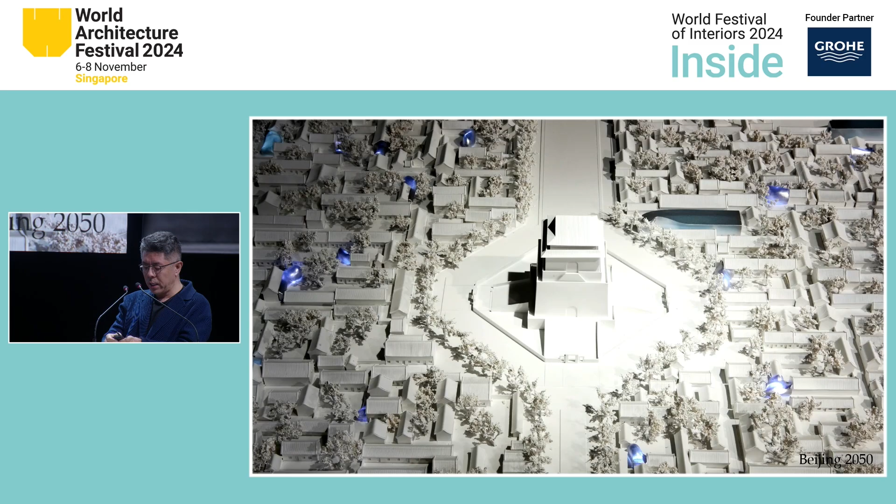And those are toilets, because in those small courtyards, they don't have a toilet. So I decided to make a new bubble structure with a toilet inside. Here you see the new structure and the old structure.

The reason I'm showing that is to talk about what nature is in this case. There was a famous writer saying that in the traditional courtyard, what's most important was the negative space, the emptiness inside the courtyard. In the courtyard you have sky, earth, trees, and nature, and the people live around it, they have a family, they have love inside the empty space, which is the most important thing. Architecture and buildings were just a definition for the courtyards, so the buildings are secondary in this traditional value.

But in this case, we try to use this reflective material quality to show the surrounding sky, trees, and old buildings into the new structure, so that this bubble almost disappears into the space.

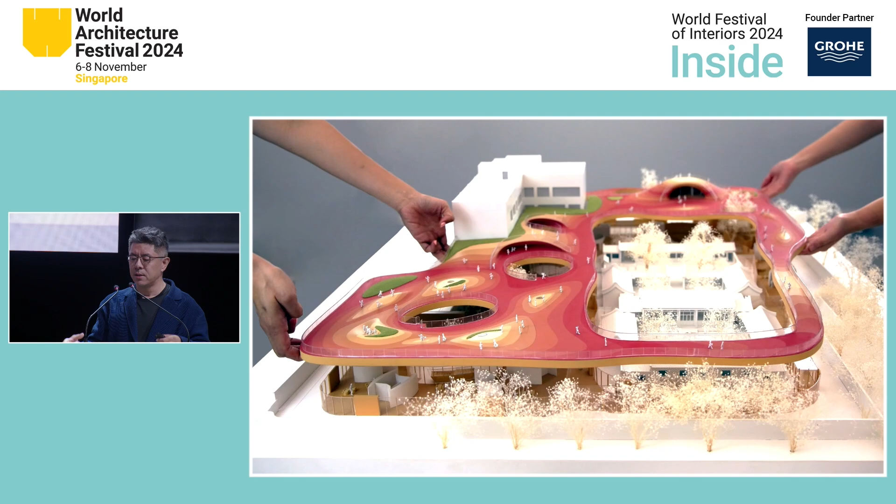The new and old look totally different, but they're connected - all the spaces underneath the classrooms are connected. When the building was completed, you can see the kids running around on the new roof, which is very colorful. So the color and material of the architecture clearly tell which part is new and which is old, but they both have a courtyard.

Remember I mentioned the courtyard typology - the empty space and trees inside the courtyard were more important than the architecture itself. That's why I think it's important to continue this typology, protecting those trees by providing the new courtyard. Inside this space you have natural light and natural ventilation.

People can play outside, and it's more like an inward-facing kind of space. But both new and old architecture respect the nature, the trees, and the scale.

Actually, if you stand in this old courtyard and look around, you don't see the new building at all, because the scale of the new building is also single floor. You can only discover it when you enter the space. Here you can see the new building through an old gate.

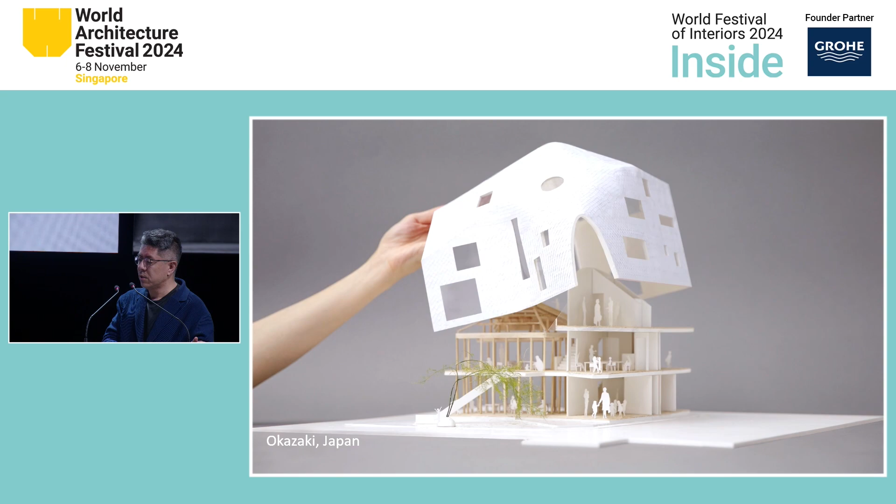This is another kindergarten, a very small house we renovated in Japan. You can see the wood frame - that was an existing building, a house where the owner lived for generations. They wanted to demolish their house and build a bigger building, the community kindergarten, so the idea was to keep that wood frame as part of the new structure.

They had this ceremony when they started groundbreaking - I think that was such a moving moment. This small project, not many people involved, but they really respected the land, which is the foundation for the building, and also a foundation for the families and the memories.

This is when the kids were standing here, expecting the new kindergarten, the new house. And that's when the building was completed. From outside, you see this white tent, almost like a soft building with some windows. From inside, you see the old structure.

So the old structure was half of the new building, and we kept the structure to hold some space, which saves some budget, but more importantly for us, to keep some memories from the past. So the family, the owner, when they're in the new building, they can see these old wood members and remember their old house. The children, when they grow up, know the space has stories about the building. What's inside is deep rooted into the story, the narrative of the land, but outside it looks different. You see these neighbor houses, and this building looks new and almost a little childish.

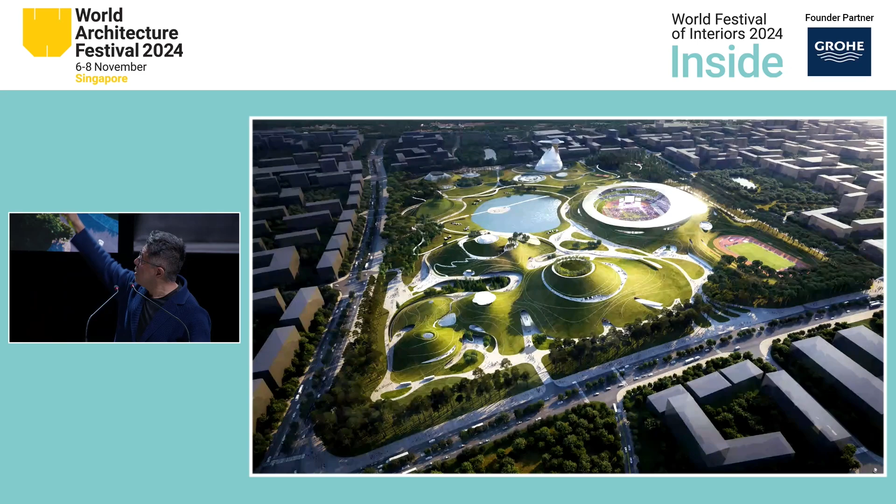Here is a rendering, a proposal for a sports park in China. It's a very large scale. You see several stadiums here, but the idea was to bury all these stadiums into green mountains. From outside, you see this green slope, very large scale, almost volcano scale. But you can also climb and walk around those green mountains, reach the mountaintop and look around. What's inside is a very large stadium like this. This is another mountain; inside is a swimming pool, but you have natural light and natural ventilation. It's not underground, it's above ground.

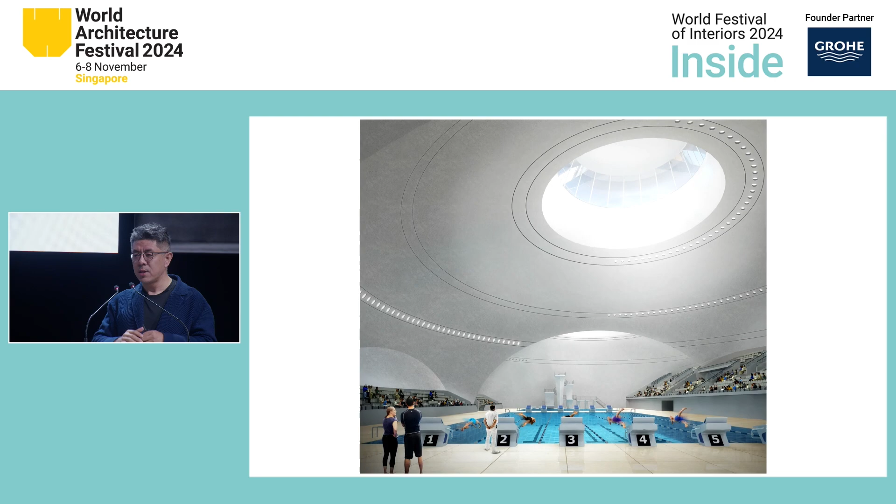We just replaced the building facade material with green, and then we completed one outdoor stadium. Now we're constructing the rest of the mountains. So what we're creating here is not a building, it's not a monument. Instead, it's a park, a natural environment. People can feel free, they walk around, they can wander on this slope. The idea is the stadium is not just a place for matches or competition, which is the core value in our modern city—we build new buildings to show strength and power. But here you feel freedom, you feel the green. It becomes more leisure, a daily space for people to bring their pets, family, and kids to enjoy nature.

So you see the whole environment—we try to bury all these functions to let the large-scale structure disappear. But underneath, you still have the building, right? You have the corridor, you have the structure. This is some concrete entrance, through the space underneath the green into the stadium. In the future, there will be a new high-density city around this place. So in this area, the idea was not having many big buildings, but an empty park, a green space. I think it's to borrow the concept from the old traditional courtyard, but use it at a larger urban scale.

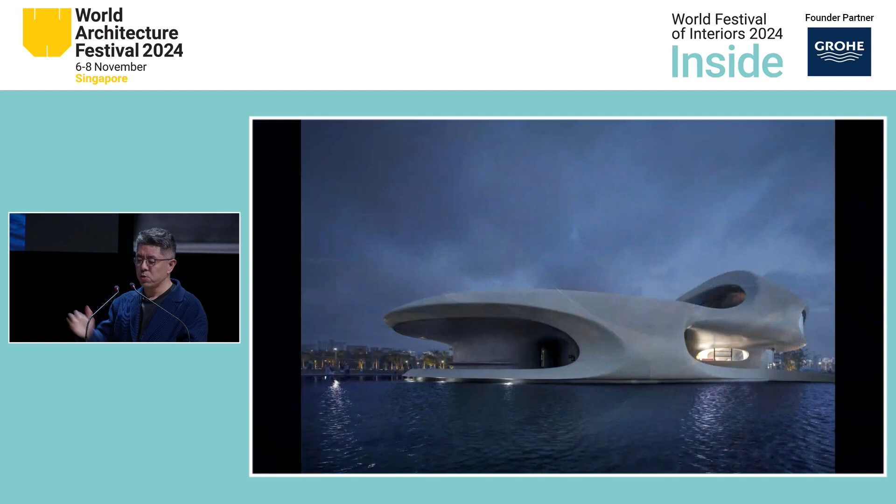So those holes are the key, which again is emptiness. Inside those holes, you have a shaded space, which is very important for this tropical island, a very hot place, because they provide shadow and air ventilation. But we're also using holes in the ceiling to bring some natural light into it.

You can see the bookshelf. In this space, you can sit here with some dark holes, some bright holes, and then look at the ocean from here. So you can read a book with this new angle to observe the ocean, the sky. What's important to me is that, of course, nature is objective—the ocean is always there, the ocean is always beautiful. But what's more important is to create this surrealness, a space of surrealness, where you can stay and observe nature from a different angle.

There's a staircase, and there's another reading corner. We also created this small library space for kids, so only children can come in here. We also bring natural light, so it's a small space with a lot of holes as well.

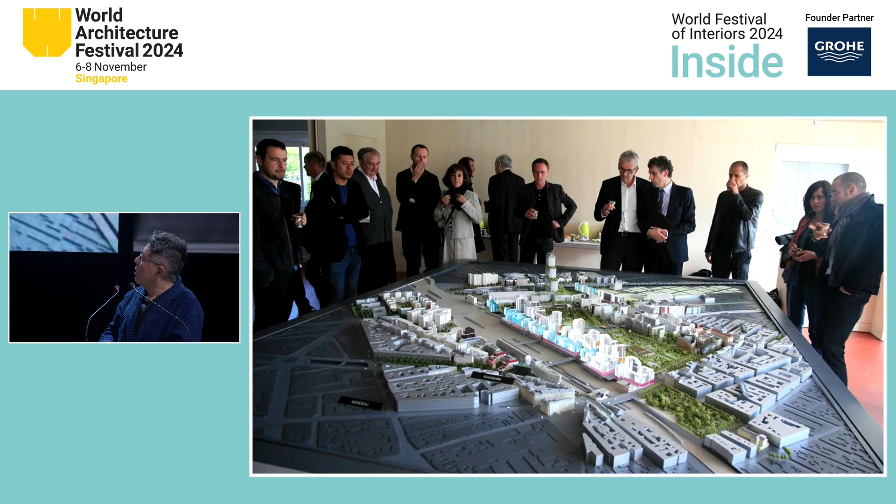This is a residential tower we built in Paris, called UNIC. It's a building in this community where they have a lot of international architects, and each one designs a building in their own language. Our building introduced a lot of curvature onto the balcony.

We have a lot of outdoor space, but what I want to talk about is how we designed it. We almost hand drew all these balconies, which is why you can see they all look very random and organic, waving in different ways. I think that's how we can have a very natural feeling in a residential structure like this.

So that's the view down. From here, you see there's a kindergarten at the podium, and people have this opportunity to see the nature and to see other balconies. So this almost blurs the shape of this building, using these curves to make it more of a living structure.

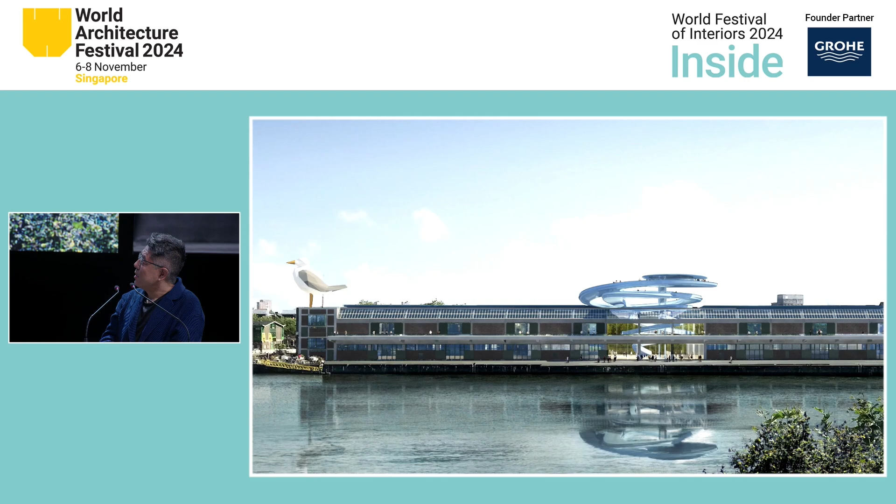That's why I also designed a bird here. I brought a seagull over there because I thought the seagull was a metaphor for movement, like people move around as a bird.

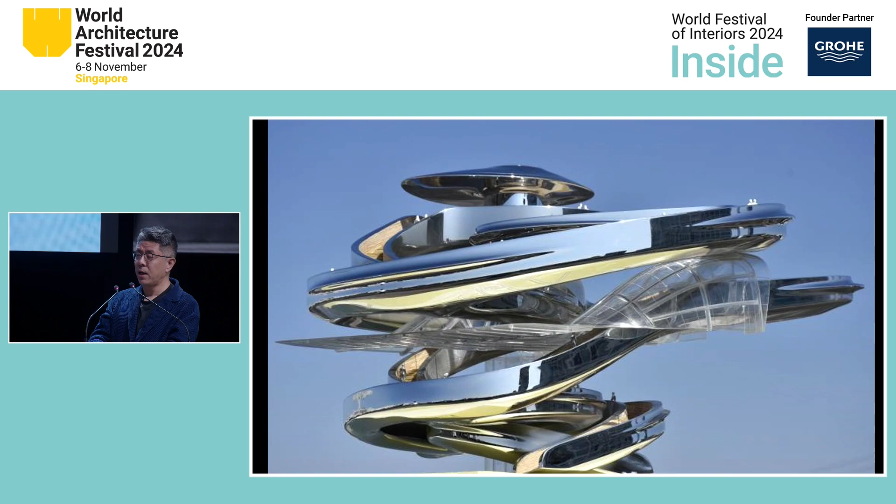So here is the tornado structure. It's actually functional as a staircase, bringing people from the lobby to the second floor, and then continuing their journey to become the sightseeing platform above the roof. We're using stainless steel as the structure and also the cladding system.

This is some construction pictures. So the idea is to make this tornado really floating. We don't like columns, we don't like supports, right? This has to be floating in the air. And there's an elevator in the middle to bring disabled people up and down.

It's actually two staircases, so when you go up and come down you can use different routes, and at some point people can meet each other.

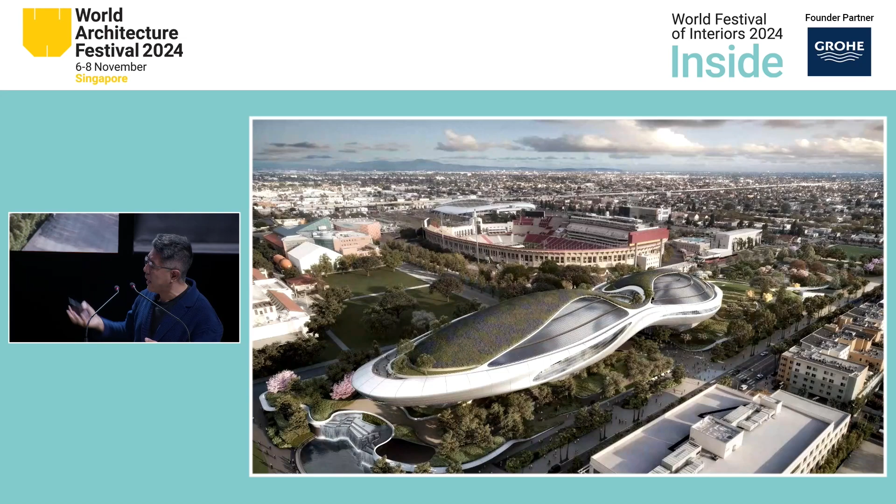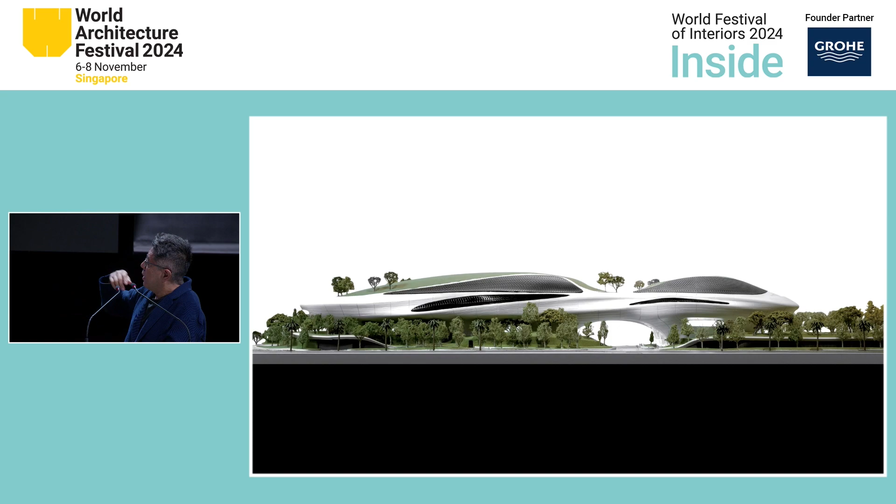Build this floating garden, so on top of the building there's a lot of green and a roof terrace. We float this structure to allow a lot of green happening on the ground level as well, and the whole linear side has a very big park. So the building is floating, almost like floating above the land. Also, in the middle of the building we created a big arch to be a gateway from this side of the building to another side.

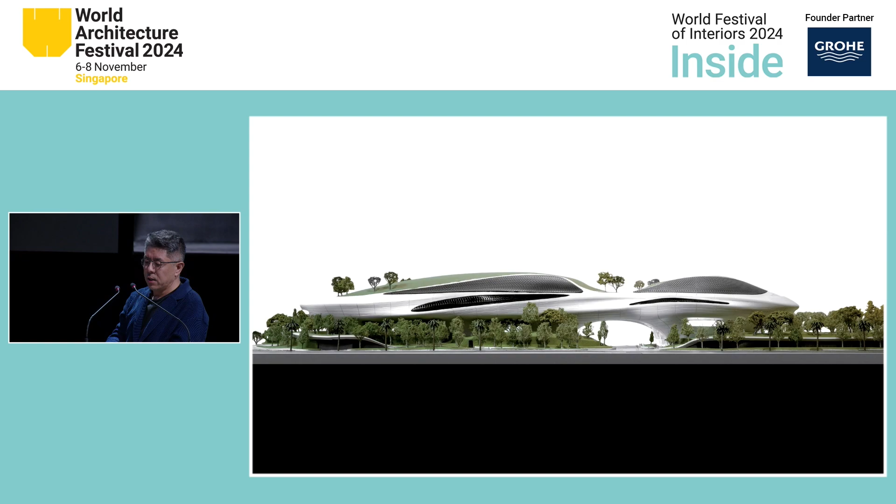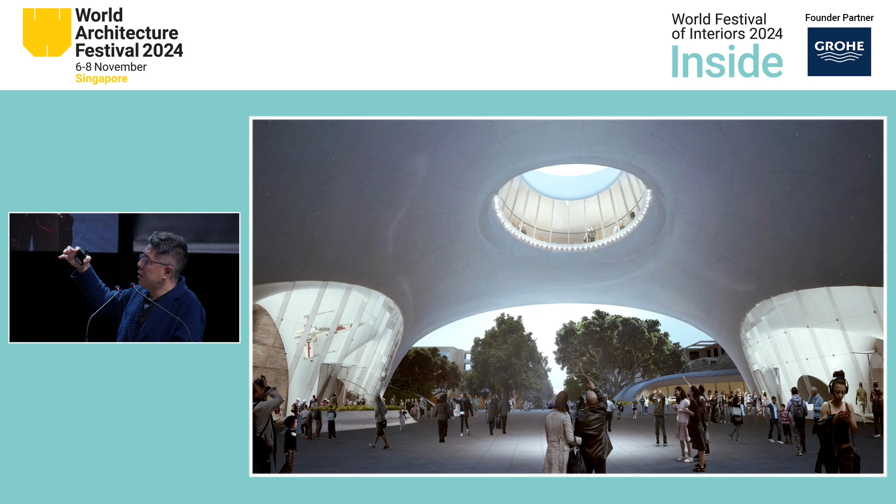Here you can see the scale of this gateway. It actually becomes the entrance plaza to the museum, but you can also pass by to enter other museums, like a natural history museum and space museum on the other side. So this building becomes the entrance to this museum park. Here you can see the shaded area underneath the building, but you can also see through the top floor.

Here's some construction photos. You can see the building already showing the floating quality, and we also have a lot of solar panels facing the west side of the building.

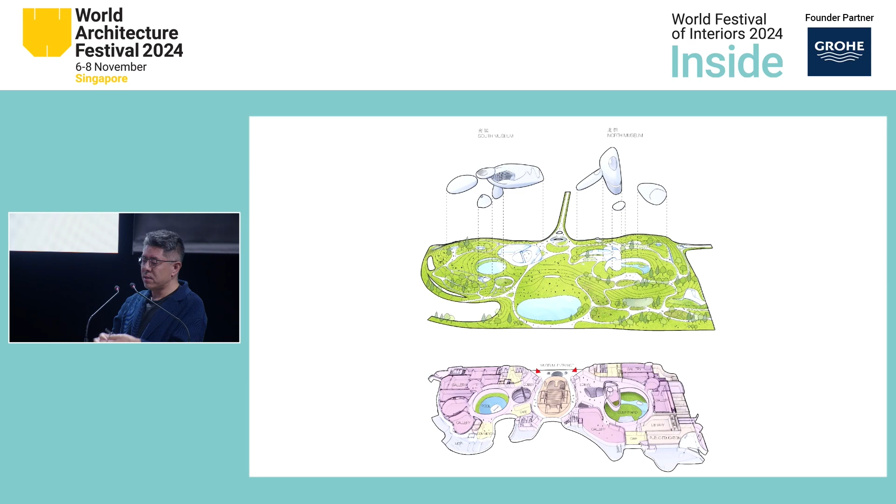The last one is also under construction in Shenzhen, a city in Canton, China. These are two museums. You can see some stone shape, right? But what you see is actually more like a sculptural space above the green park. Underneath the green, we have the major exhibition halls and the courtyards.

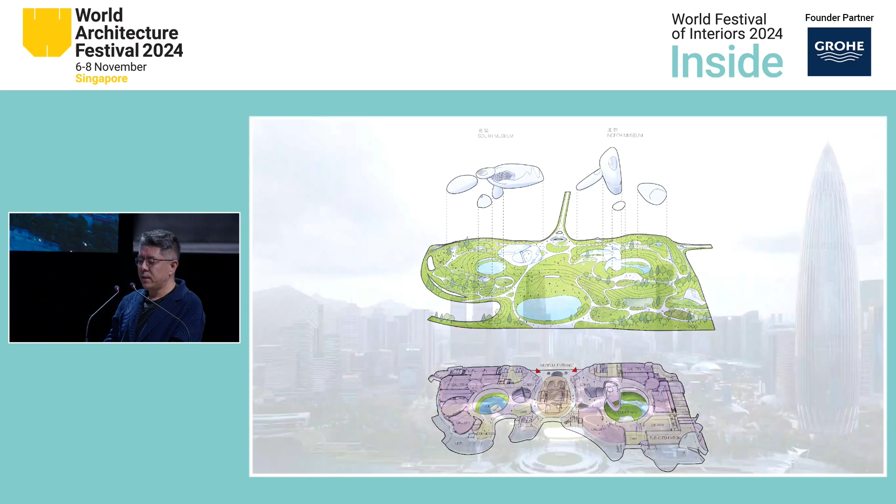So many modern architecture. What we want is something more like an ancient landscape, like a huge rock by the river. But when you apply the building technique, the material, the details, it becomes a little abstract, reminding me of future existence.